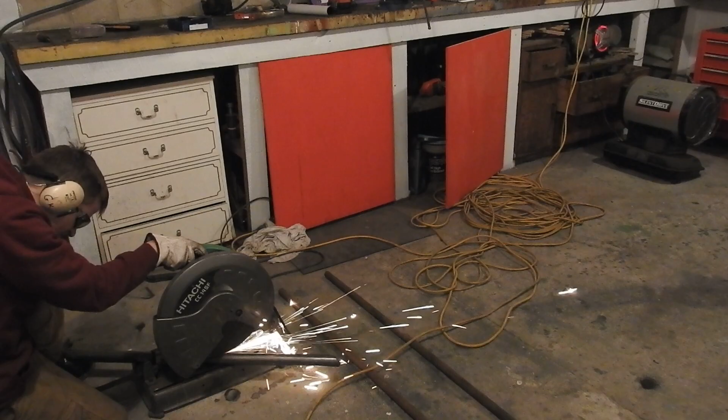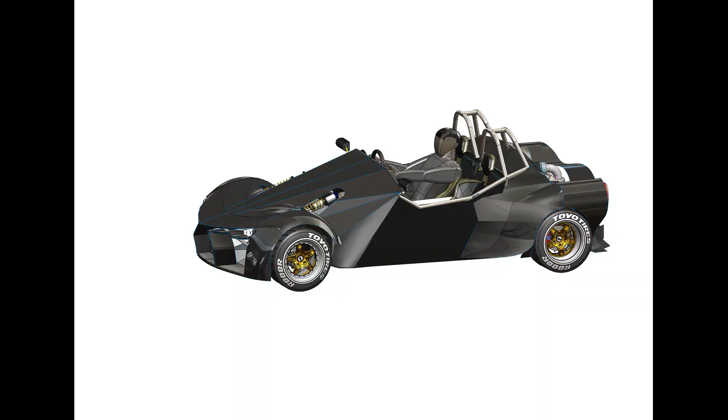This is the car I've been designing now for the past year in SolidWorks, and here it's just some PhotoView renderings I did, trying to come up with some ideas for the overall look of the car. It's come a long way.

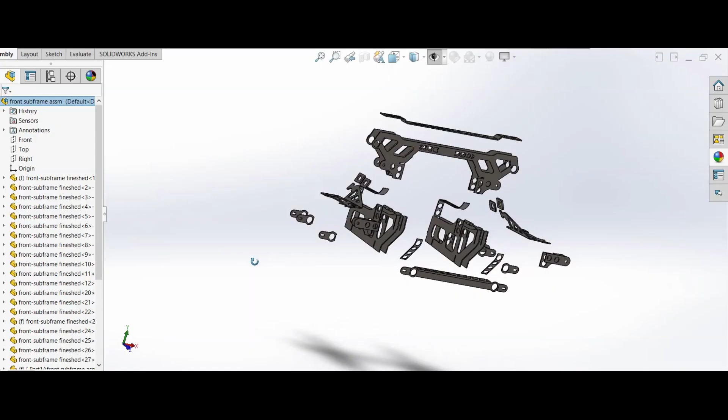It was originally going to have a Hayabusa engine, but now I am opting for a K20 Euro R that I will turbo and put a bit of boost through.

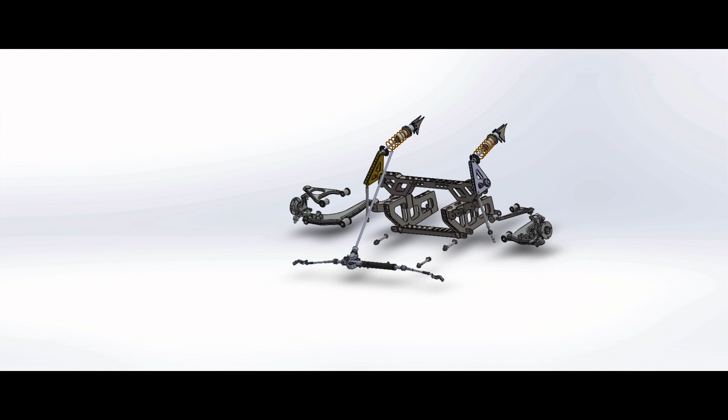With SolidWorks I was able to make assemblies of the subframes like this and then cut them on a profile cutter, which made it really easy to piece together with tabs and slots, then weld up, and it all came out perfect to the geometry of the car and what I was wanting.

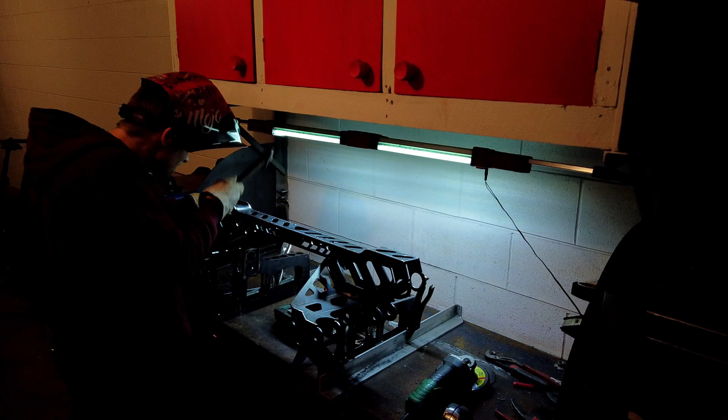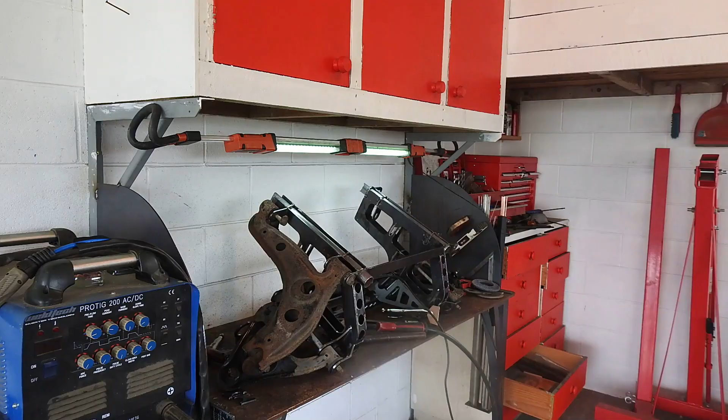With the rules in New Zealand, for the arms and uprights to be certified for road use, we have to get the welds x-rayed, and there's quite a process to go through.

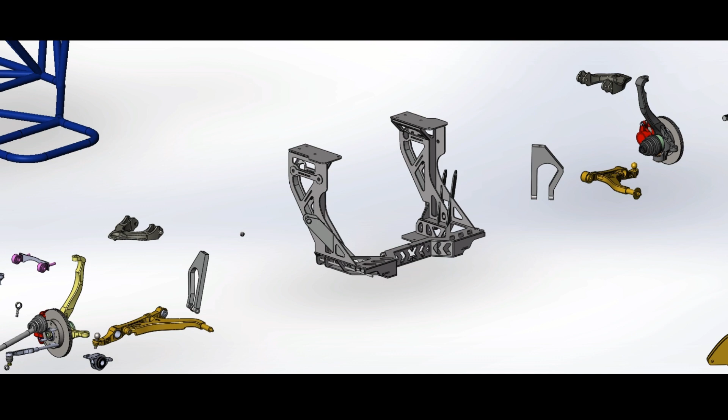So what I opted to do was take stock arms from the front of an MX-5 and the front of an EG Civic, and put them in the back of my car. That way I could get around this.

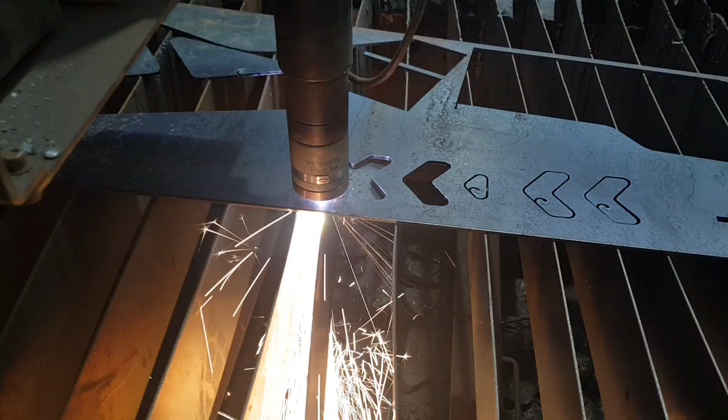My subframes have the same pickup points as those cars, keeping all the geometry the way it should be, apart from the fact that I have the front of an EG in the rear of my car, so I just had to add some bits to make that work, obviously.

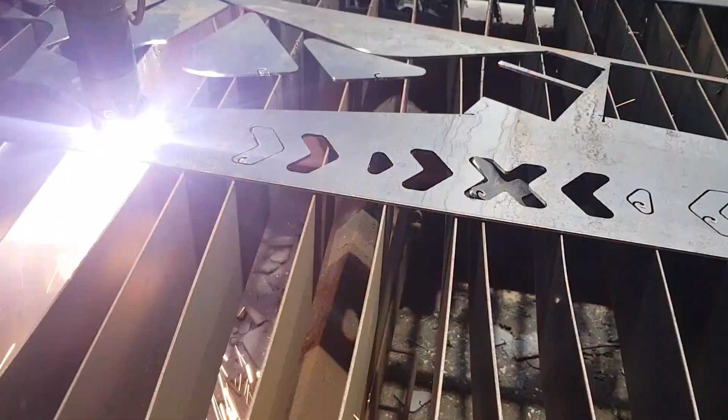Here's a shot of the profile cutter cutting out the parts, which really give this car the character it has - very engineered, and which worked out to be really lightweight and look just the way I wanted it to. I was pretty happy with how it came out.

Now I'll just leave you with a time lapse of the rear subframe coming together.

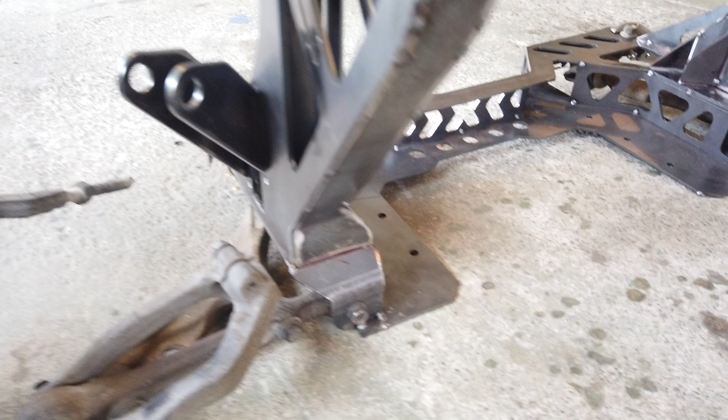I was lucky enough to have done this design and had a whole lot of the stuff I needed to crack into this build before quarantine hit. So when quarantine rolled around, I was ready to go and start my fab work.

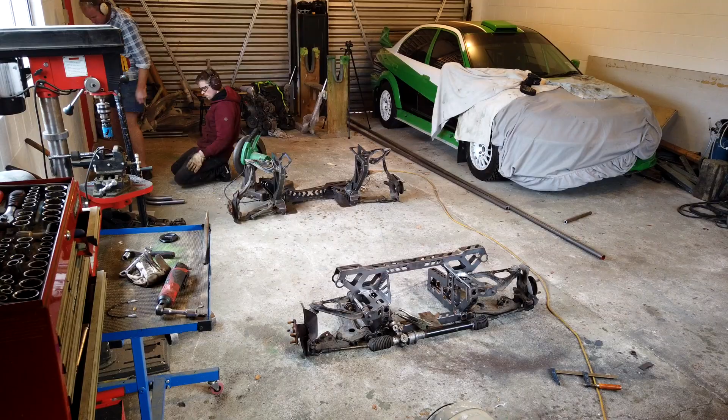I hadn't done a lot of notching before, so this frame coming together was tricky at first, but once I had it sussed, it was quite enjoyable.

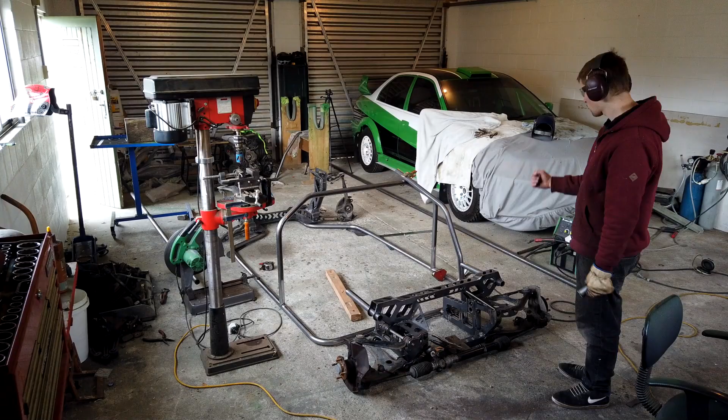I didn't have as much tools as I'd like to have at home for doing the notching, but I made it work, and it came out awesome because all the fitment has to be just right since I want to fully TIG weld this frame.

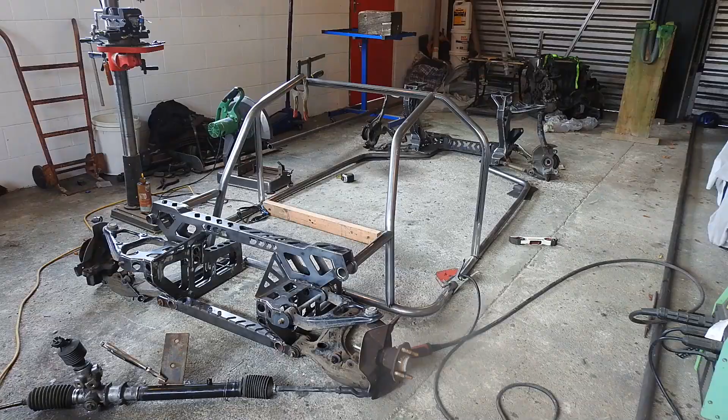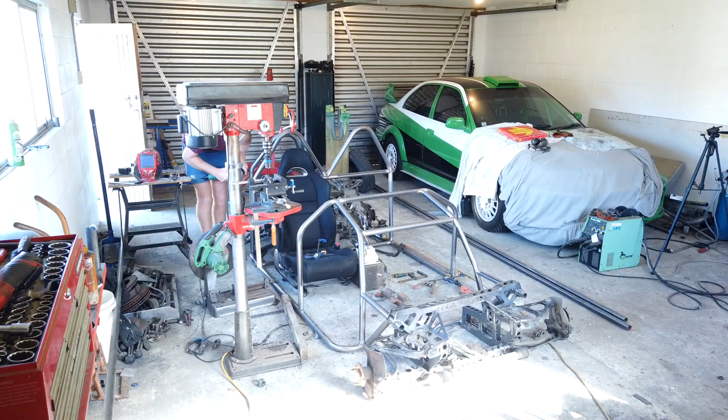I wasn't able to do all the welding on the frame at this point. I was saving my gas so I didn't run out, which would have brought me to a stop during quarantine. So I got as far as I could by just tacking, and towards the end I used the last of my gas running a few welds so I could wheel the frame around.

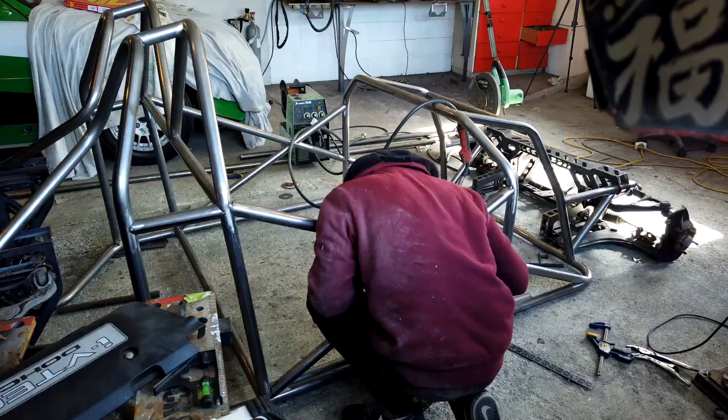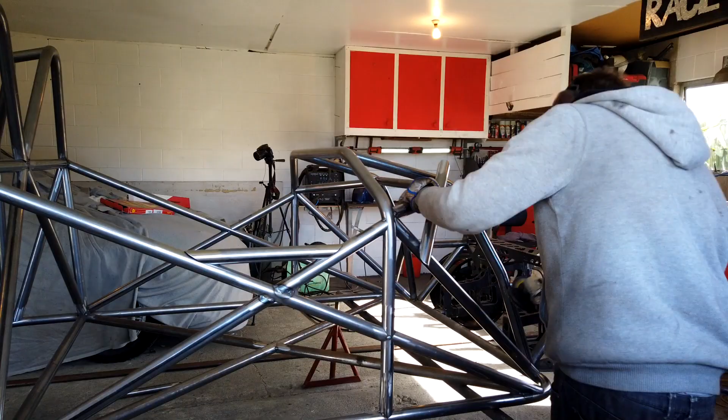So what this build means to me is really awesome - finally bringing all the skills I've been learning over the last few years together to a project that's fully for me and exactly the way I want it. I couldn't be more happy with the results so far, and I'm looking forward to getting some more parts once quarantine is lifted so I can push on, get this thing on its feet, and eventually start hooning it around the streets.

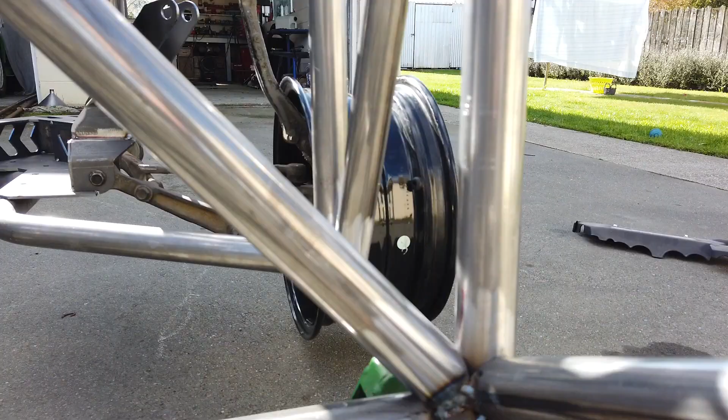Knowing that the deadline for this car show was on the 25th, it was really good motivation for me to get as much done as I could while on quarantine.